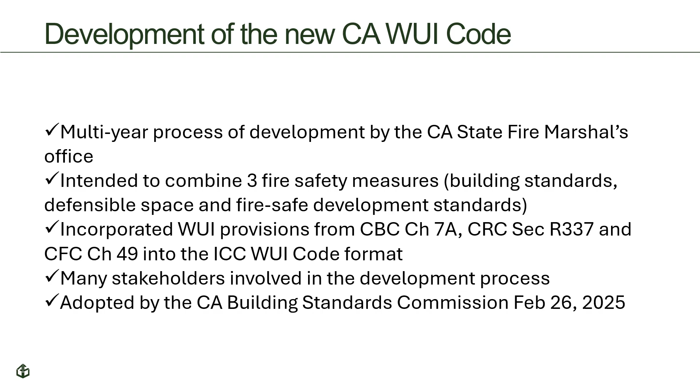Moving on to the provisions. We're going to actually go through the code. Now, being the good engineer that I am, we're going to start at the beginning. We're going to go through the end. We're not going to talk about every provision, however. We're going to talk about some of the administrative issues, as I mentioned. We'll bring up some of the code sections. Again, if you're familiar with the criteria that we have in front of us in Building Code 7A or Chapter 49 of the Fire Code, these will look very familiar to you.

So here we are. The scope. We understand that we are looking at the construction of buildings and other structures in these identified fire severity zones, WUI areas, if you will. The idea, and you can see at the beginning of the third line, is that this criteria primarily applies to new buildings. It does not necessarily have a retroactive type of enforcement built into it, because it'd be very difficult to get people to upgrade their buildings, their facilities. It's very costly to do that. However, we'll talk about some of the additions and alteration types of situations in just a little bit.

Obviously, we've already talked about the minimum requirements in this particular code and mitigating the hazards from wildland fires. This particular document, if you're not familiar with this, in particular from Chapter 49 of the Fire Code, also addresses the areas that surround these buildings and other structures themselves. And so we'll get to talk a little bit about vegetation. We'll talk about some of the space concerns out and about and the protection that those spaces provide.

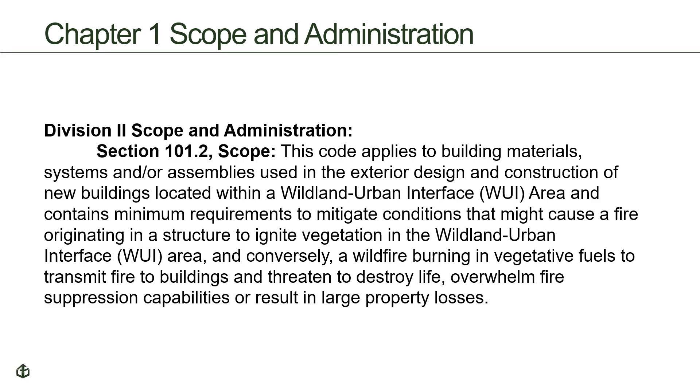Obviously, we're trying to provide our suppression responders with safety too, and to keep large property losses down to a minimum. So that's actually built into the code under the scope itself. It's a very lengthy scope, but I think it's one that is very clear in its approach and application ultimately.

Speaking of application, this makes the application to new buildings very, very clear. All new buildings, I added the term all, but new buildings located in any fire hazard severity zone or identified WUI area must comply. We're talking new from the ground up. Obviously, as with any code, there's exceptions, and we have those listed here. There's five. So the first one are just regular accessory buildings, sheds. Some play structures are actually very complicated. Those fit into this as well, in terms of the very large tree houses and things like that

that can be built on properties. We're very concerned about the application of this to agricultural types of structures and buildings, and so we have an exception for that. And what you can see in both of those is that they have to be at least 50 feet from the applicable building on the same lot. Very interesting to look at that, and then to understand that if you're within 50 feet, guess what? It applies. We have concerns, and that's part of the term that we're going to use, defensible space issues built in.

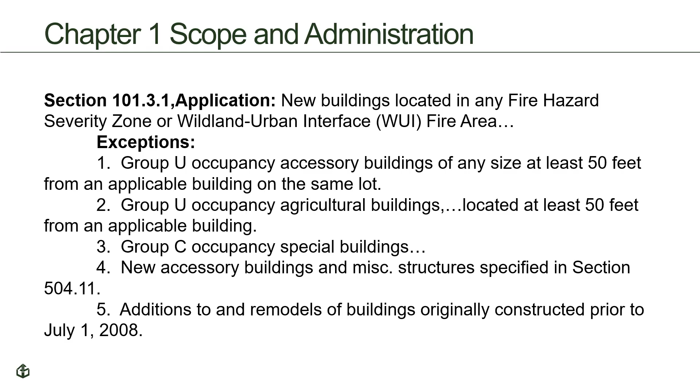Now, with that being said, we do understand that there are a lot of existing buildings that were built prior to July 1st of 2008. And so we'll talk about some of that when we get to the future direction and some of the potential, if you will, at least the discussion that is occurring related to these particular buildings.

Okay, speaking of additions and alterations, you can see that they can be made. All right, one of the big concerns with this criteria is that if you have a small addition or a small alteration, then would you have to upgrade the entire existing building? The answer is called out in this particular section. No. There are some provisions in this code that do apply to existing types of conditions. We'll talk about some of them, but we're going to have to dig a little bit deeper, I think, in a future presentation as to where those are.

The main thing that we have is found in that last line in our slide. Unsafe conditions cannot be created by either the addition or the alteration. We don't want any of that to occur also. So we're going to be looking at that as well from an enforcement standpoint too.

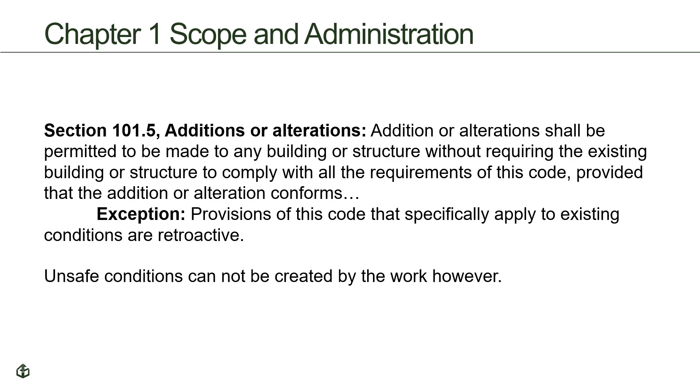This is a very, very interesting section. It really comes from the fire code, I believe. Building structures, landscape materials, vegetation, defensible space, or other devices or safeguards required by this code shall be maintained. Wow. Okay. So, in other words, the owner, as we see in the next sentence, or the owner's authorized agent, has to know what was required under the previous code, or the original code that was used for the design of this particular building.

Maintenance is something that is unfamiliar to a lot of building department staff. We do have code officials, code enforcement officials, who do get into some of those concerns in those areas, but they don't know about this particular code yet. And so we're going to have to make sure that certainly the owners and their people in the insurance interests are very familiar with this and can move ahead.

Insurance has become a very big concern, obviously, here in the state of California and frankly across the United States when you have these buildings in these particular WUI areas and the like. And so I am sure that a lot of the insurance interests are going to be taking a little bit of a closer look at how buildings are being maintained.

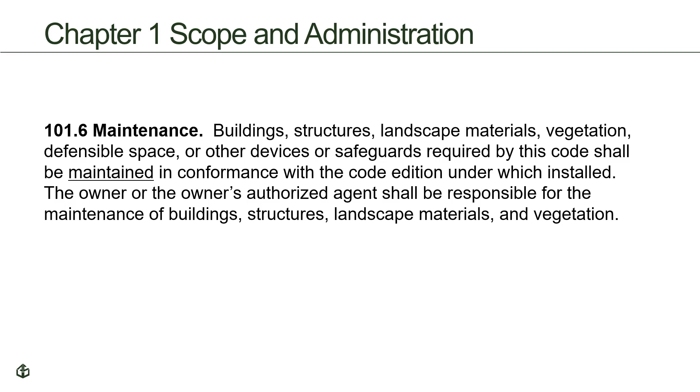I myself received a letter from our insurance provider indicating that our roof needed to be re-roofed. We needed to have new roof covering and all that. Otherwise, they were going to frankly cancel us. So guess what? We just finished a re-roof project ourselves as a result. They will be taking a much closer look at everything related to fire protection, whether you're in a fire severity zone or not. I currently do not live in a fire severity zone. They still did that. Interesting.

Now, when you go through the adoption of this particular code, and certainly all of the California codes, obviously a big part of that adoption is the administrative provisions that we're talking about here and the requirement for permits. Now, in the building code, we don't have as much of a specific list like this for various types of uses or activities. Ours are more related to the structure itself, maybe the size of the structure.

There's some activities there, but as you can see from this particular list, there are a lot of uses that are basically required to get approval for in wildland-urban interface areas, okay? There are some very interesting ones, some that are unbelievably obvious, and we've had for a long time, open burning, fireworks, but flammable or combustible liquids, hazardous materials, LPG, liquefied petroleum gases, that's interesting.

A lot of the structures, cabins, if you will, in more rural types of buildings use LPG as their energy source. So they would have to get a permit for that. They do that anyway, okay?

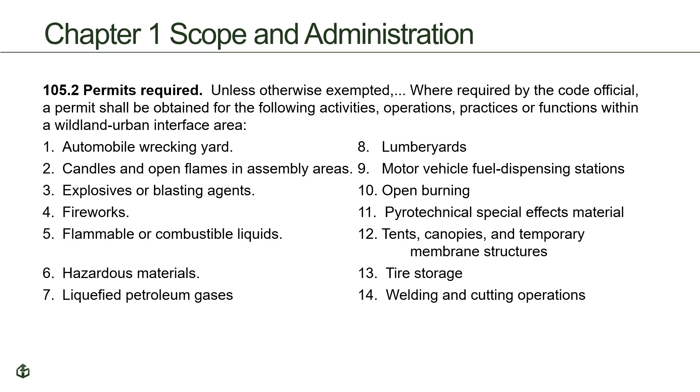And then there's temporary uses, temporary structures such as tents, canopies, and the like that you would find potentially for different events like weddings, other types of parties out there. They are going to be requiring permits based on the size, and they'll come up with their own criteria and the like.

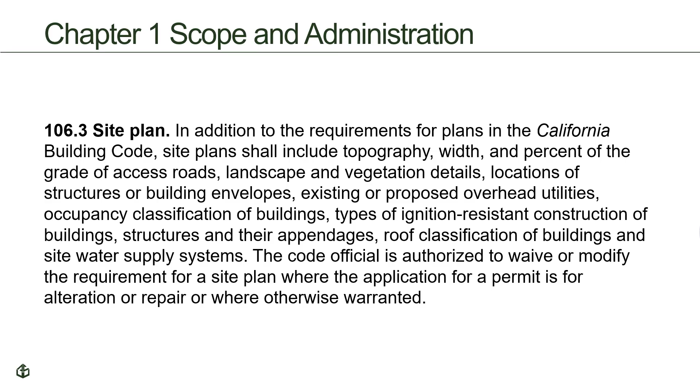Speaking of vegetation, this is one that while we see this in other areas because of water conservation concerns, we're looking at this from a fire resistance kind of lens. Okay, prior to the building permit final approval, not permit issuance, the final signature, if you will, approving the project, the property itself has to be shown to be in compliance with the vegetation management requirements that we have here in California.

Very, very interesting, especially for those of us in the building code side. We're not used to looking at what is surrounding the building. Well, we're going to have to be from now on. And in fact, one of the future items is going to get into that in a big way. And we'll talk about that here in just a little bit.

A fire protection plan. Now, the code official needs to determine whether or not it's required, but effectively, that plan needs to be in place, again, when the code official feels that it's required by Section 602. And it has to be submitted for review and approval prior to permitting.

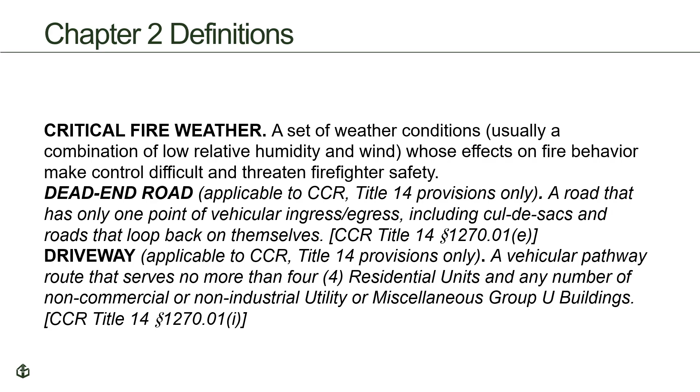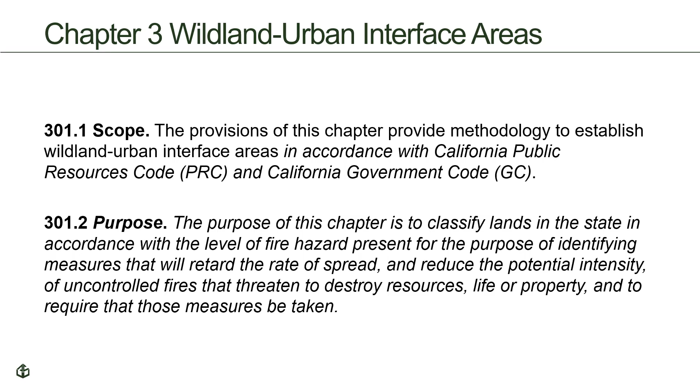Okay, very interesting, because it doesn't mean that it has to be actually on the property itself. It could just be some dirt road or whatever that's out there. We need to make sure, though, that that particular pathway, for lack of a better term, is available for fire apparatus or other types of equipment to go up there and conduct their operations. Another big one, a really big one, it's surprising, is premises identification, proper address.

We want to make sure, certainly, that when addresses are identified as having a problem, wildland fire presumably, that those people, firefighters that are sent up there, can find that particular property. Make the right turn, get to the right driveway, things along those lines.

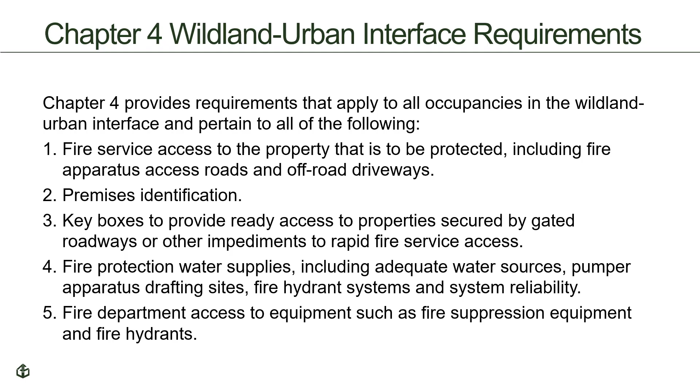So that's something that doesn't typically require a permit. Very, very interesting to see that there. I don't know how we're going to enforce that, except perhaps during the inspection of these particular buildings. But it's interesting to see that, because sometimes the different activities, since they don't require a permit, go on without anybody's oversight. The construction of exterior walls, doors and windows, ventilation openings, accessory structures, things of that nature are all built into this particular chapter.

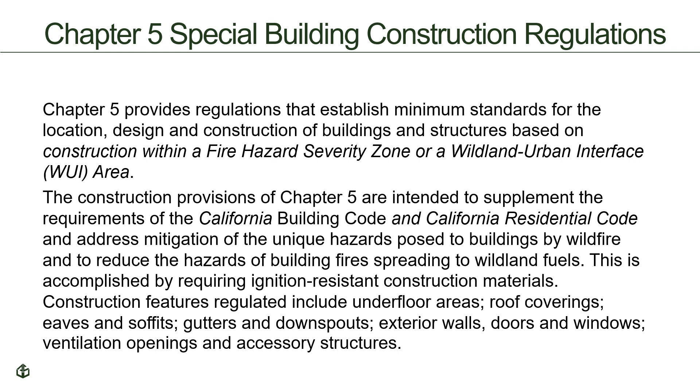And if you remember, the accessory structure exception in the beginning, the last accessory structure exception talked about complying with section 504.11. Obviously, this is chapter 5. So that's here in this particular set of criteria. It's again consistent with what we have right now. We'll talk about some future issues and different things going on that the state fire marshal is working on right now through their task force and the like as we move through the end of this presentation.

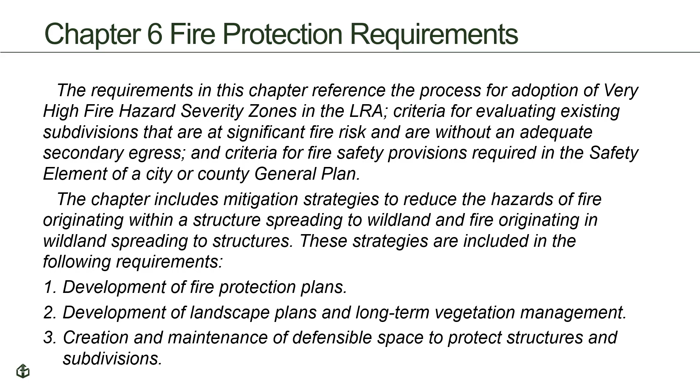So in order to have these legally, when you go through your adoption at your city or your county or what have you, make sure you list out those particular appendices that you want to include, or just make sure you don't list ones you don't want to include, that kind of a thing.